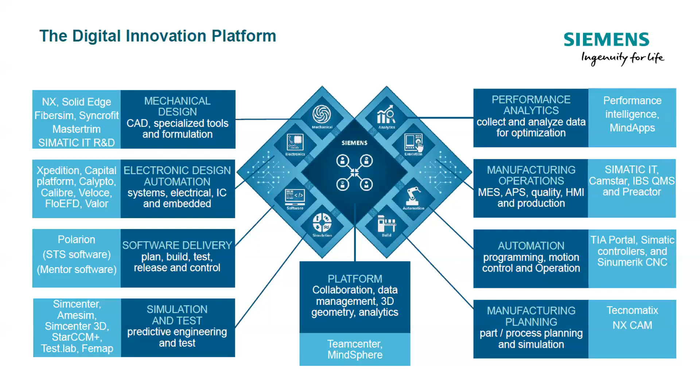Within NX, obviously, we have the CAD CAM. We also have simulation analysis tools within that, and the same as with Solid Edge. Under the software portfolio, there's solutions for a vast array of applications for electronic design automation, software delivery, simulation and test, performance analytics, manufacturing operations, automation, manufacturing planning, and all these can be made work together in collaboration using Teamcenter and MindSphere.

Let's focus in on the ideation phase, where performance engineering plays its biggest role in the product development process, and discuss a bit more how performance engineering also needs to evolve to support the concept of a holistic digital twin. First, it is clear from the trends that today's companies are dealing with increasingly complex systems and technologies, so it is critical that the tools they use deliver realistic representation of their product to give confidence in their designs and their design decisions.

Second, to support the digital twin, it is critical that performance engineering processes are not isolated and disconnected from the rest of your organization or the PLM process. We need to connect people, projects and data. If companies are able to reduce barriers, they not only increase their process efficiency, they also get a more holistic view to make the right decisions with all stakeholders across the organization, and are able to close the loop and complete the engineering cycle.

Finally, having a realistic integrated process and models today is not enough. You also have to be able to deploy them so that they bring necessary insight to make decisions and do it quickly. So companies must have the ability to intelligently explore the design space to quickly trade off and discover better designs. This, of course, also means that we need to be able to interrogate the information from these hundreds of designs to make the decisions. High quality analytics as well as visualizations are also critical to make the simulation usable and accessible.

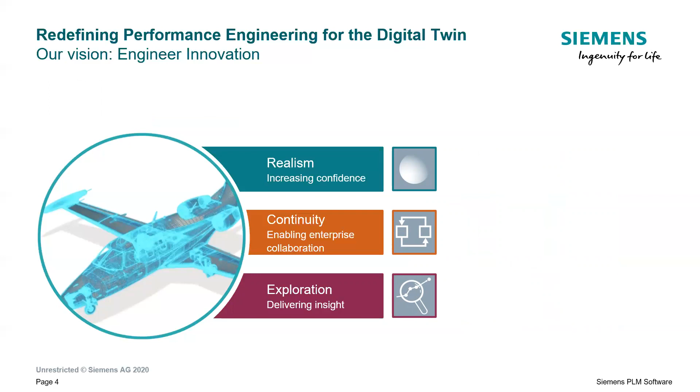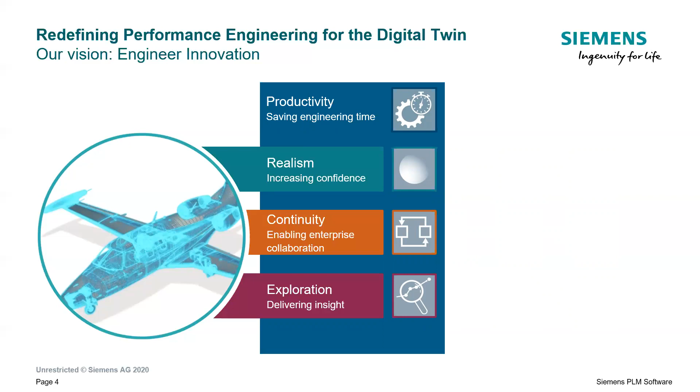And of course, the backbone of all of this needs to be a set of streamlined and automated workflows, consistent interfaces and efficient processes that reduce engineering time and allow engineers to spend their time where it matters, innovating. When companies transform their performance engineering processes in this way, they're able to engineer innovation. Ultimately, what this means is that they increase their market agility to bring better, more innovative products to the market faster and at a lower cost. This is what the Simcenter portfolio helps our customers achieve.

So how does Simcenter 3D realise this vision? First, let's look at how the portfolio delivers realistic models and increases model confidence. Simcenter brings a wide range of physics and disciplines together under one umbrella. Through its multi-fidelity solutions, including system simulation, CAE simulation, as well as efficient testing solutions, Simcenter covers all stages of development and leverages the tools together for a better product representation. Finally, we ensure that the solutions in Simcenter work together and embed the necessary technologies to capture specific industry challenges. By using all these capabilities together, engineers can be sure that predicted performance of their product will match real-world behavior.

Let's look at how the portfolio focuses on delivering insight. Simcenter includes an efficient and easy-to-use intelligent design exploration framework that easily integrates with your current design and simulation tools and fully leverages your HPC infrastructure. Simcenter also enables high-quality data and analytics to gain insight into data from many sources and make informed decisions. Simcenter includes dedicated post-processing and visualization capabilities to broaden the comprehension of the results.

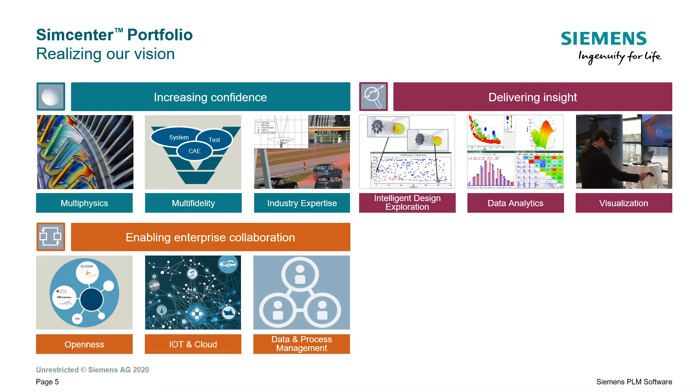Engineering teams today are generating huge amounts of data, and in order to be effective, this data needs to be managed and tracked. Simcenter is integrated with Teamcenter simulation process management to help engineers manage their models and data and keep them in sync with the design.

Let's look at how the portfolio focuses on your productivity, helping you save engineering time and accelerate your return on investment. The portfolio offers complete deployment flexibility to the user. This is achieved through flexible licensing to ensure companies can maximize the value of hardware and fully leverage investment in simulation technologies with HPC. The portfolio is supported by engineering services and support engineers.

Our team of technical experts has a broad engineering proficiency to help you achieve your complex design goals and deploy innovative engineering processes with Simcenter. Simcenter delivers streamlined and collaborative workflows. This ensures that the portfolio is easy to use and minimizes the learning curve and your time to be operational.

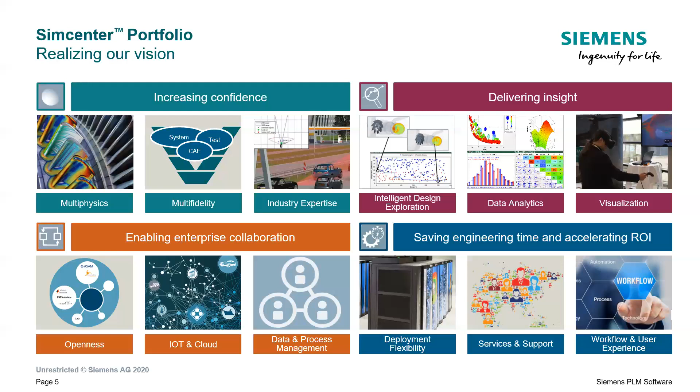Industries, processes and challenges. There's a need for high reliability, quality and performance. Products are more complex and expensive. There's a large variety of platforms and raised customer expectations. Lower product development costs are essential. Optimize not only unit cost but cost over life of the program.

Reduce testing and use testing more to validate simulation. Create products using simulation and without costly prototypes to speed up development. Develop new products faster. There are more appealing products than the competition. Make products more innovative and ensure their market appeal. Deliver breakthrough performance better than the competition, say like fuel economy, power, speed, or reduction in weight.

The machinery industry trends include the growing complexity required by customers, global competitive pressure from new low-cost providers, end customers' demand for customized products driving demand for customized machines, and regulatory pressures driving machine design. These trends are causing a fundamental change in machines and how they're being designed, built, and serviced. This has clear implications on trends, and the machines simply need to be smarter.

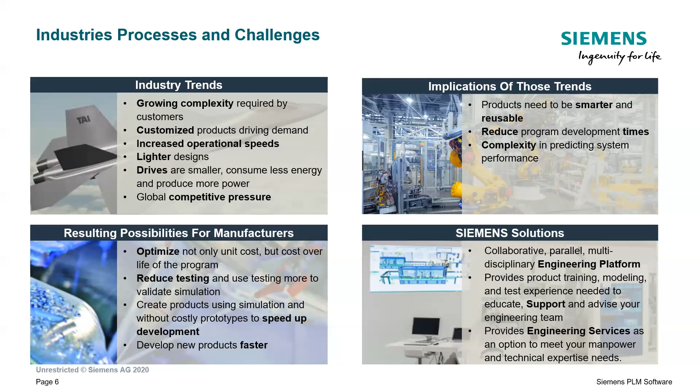There are 5 ways that Simcenter 3D is different than traditional simulation tools in use today. First, Simcenter 3D begins with the engineering desktop, which is the integrated environment in which you do all of your pre- and post-processing. Within this environment, Simcenter 3D offers best-in-class geometry editing tools, comprehensive meshing, and a unique ability to associate the analysis model to design data.

This helps engineers speed the tedious modelling process and keep analysis models in sync with the latest design. This then translates into faster design analysis iterations. Simcenter 3D then delivers accurate multidiscipline simulation from within the centralized engineering desktop. Simcenter 3D simulation solvers help you to predict real-world performance.

Simcenter 3D's unified environment is completely scalable and extensible. This means that the same familiar user interface is applied to all solutions and reduces training costs for the department. It also gives a common environment on which to build automated routines to drive simulation processes.

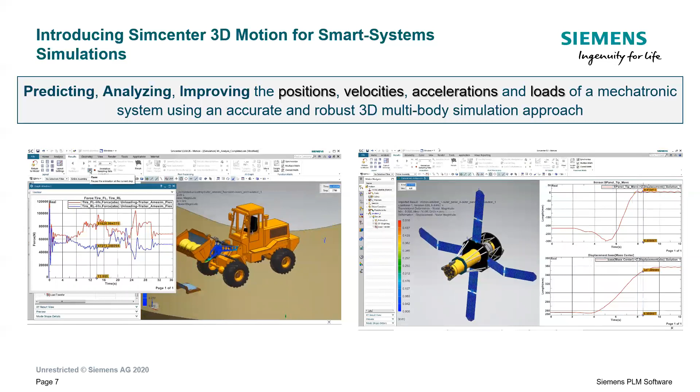Next, Simcenter 3D can link with your broader systems, engineering processes, and tools for 1D systems and physical testing. Simulation data management lets you track information throughout the development process and can help you correlate your 3D simulation models with your 1D system models and physical tests to deliver confidence that your simulations predict real-world performance.

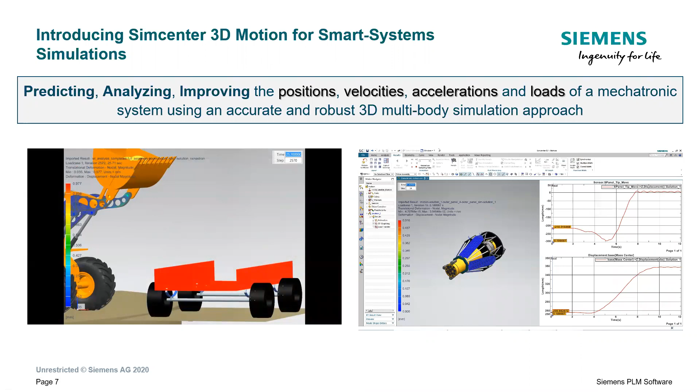And finally, Simcenter 3D's common interface means it's much easier for engineering departments to capture simulation knowledge and leverage that industry expertise by automating it and deploying it to a broader team. This can help simulation teams become more flexible and adjust resources to meet fluctuating demand. Simcenter 3D's integrated solutions also incorporate Siemens' own industry expertise that has been gained over decades.

How can Siemens help you meet the challenges? Siemens provides the world-class CAE simulation software analysis tools needed to predict complex behavior. It provides product training, modeling, and test experience needed to educate, support, and advise your engineering team. Provide engineering services as an option to meet your manpower and technical expertise needs.

Siemens Solutions: more insight by test and simulation, scalable solutions, widest possible integration, customizable, an open platform. The benefits: more insight to optimize total program costs, more insight to build in future growth compatibility, scalable solution to handle wheels, track, manned or unmanned vehicles, customizable for complex operating environments, an open platform for integrations.

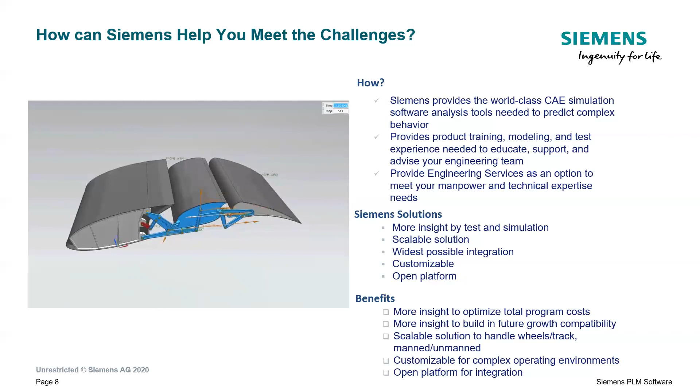Front-load designs, multi-body simulation from the beginning of the digital development process. We have close connection to design tools and scalability. For mechatronics, increase in complexity of electronic systems. The solution: easy integration of control systems in mechanical models. Real-time simulations, early integration of flight simulators in the design cycle. Solution demands real-time capable models with high level of accuracy.

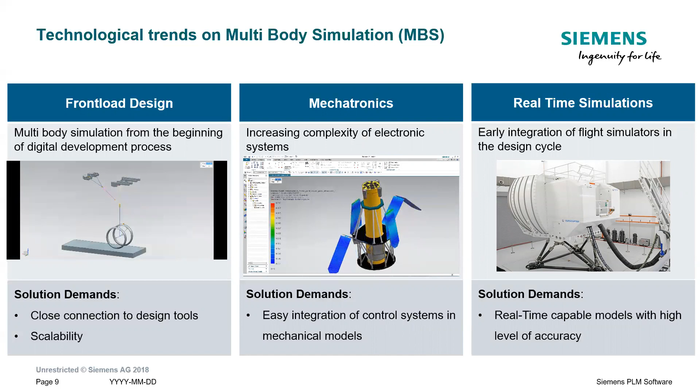Motion study is based on a skeleton wireframe concept. Results of the motion study are giving the CAD specifications: components, mass properties, mass, inertia, gravity center, joints, orientations and positions. The motion skeleton is generated following the whole product requirements. The skeleton model itself is a parameterized template in order to generate a family of models. There could be different templates per sub-product architecture type.

Reusability of the same skeleton generated model. Drive multiple revisions of the same product due to performance optimization and technical specifications. Also used for multiple configurations of the same product and mass properties. Can be used for multiple or different products.

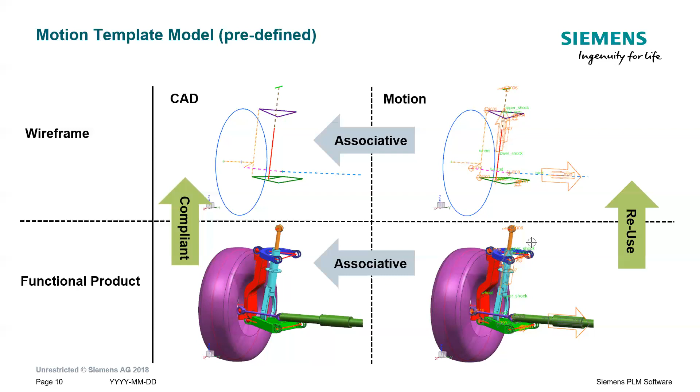Because Simcenter 3D is built using the same foundation as a CAD system, it has much more powerful geometry editing capabilities than traditional motion tools today. First, Simcenter 3D can take an NX CAD assembly model and then automatically convert the CAD models into a motion model. Each assembly component will represent a link within the motion model, and Simcenter 3D will convert the assembly constraints to proper motion joints. 3D contact can also be defined between each part of the model, and the contact definition will take the actual geometry into account.

The motion model is entirely associated to the base NX CAD model, so it is possible to update the motion model whenever the base geometry changes. This allows engineers to stay on top of design changes and speed the design analysis iterations. And powerful and intuitive geometry editing capabilities like direct geometry editing using synchronous technology let engineers try what-if type scenarios themselves without having to go back to the design team to make changes.

The NX CAD integration, it is CAD agnostic. Quickly convert CAD assembly to a functional motion model. Assembly constraints converted to motion joints, 3D contacts between bodies. Stay associative to design. Support for all major CAD formats. As we can see here, we have NX CAD, CATIA, Solid Edge, SolidWorks, JT, Parasolid, STEP, IGES, ACIS and AutoCAD.

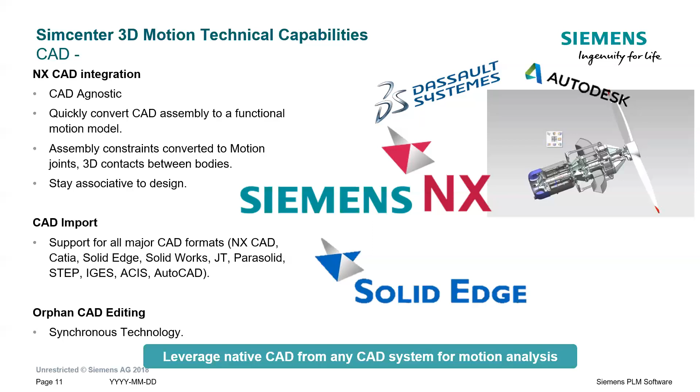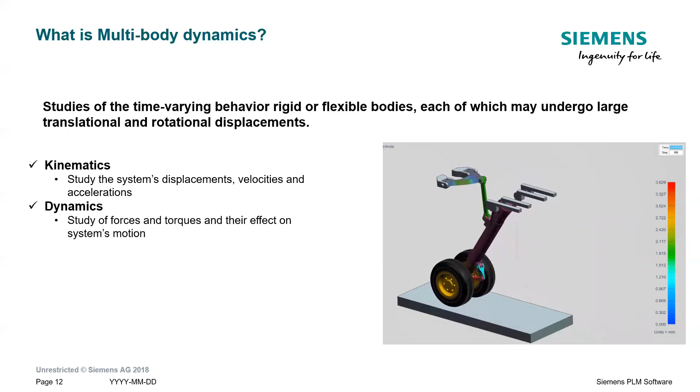Motion analysis, otherwise known as multi-body dynamics, is the study of the behavior of interconnected rigid or flexible bodies, each of which may undergo large translational or rotational displacements. Motion analysis can be broken down into two major types of analysis. Kinematics: study of the motion of objects without reference to the cause of motion. Does not take mass, inertia, forces, torques, and others into account. Dynamics: study of forces and torques and their effect on motion.

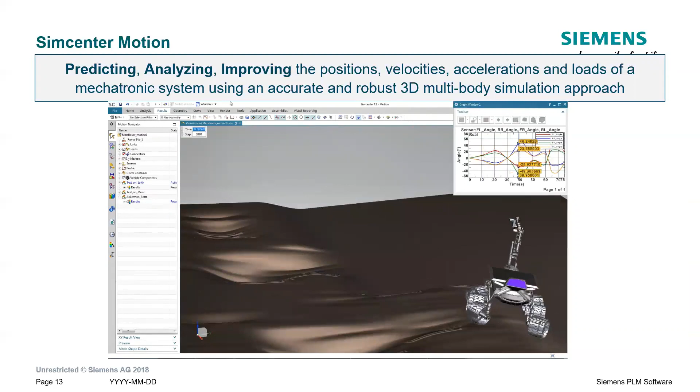Simcenter Motion is to be used to improve mechatronic systems by giving a user a set of tools to predict and analyze the positions, velocities, accelerations, as well as the loads of the system. This is accomplished through a robust 3D environment linked to a proven, accurate multi-body solver.

A good way to summarize the main characteristics and benefits of Simcenter Motion is probably a complete and integrated multi-body solution to simulate realistic motion and loads of mechanical systems, allowing to quickly analyze and optimize the real-world behavior of mechanical design and to verify that it performs as expected before committing to expensive physical prototype testing.

By detecting any problems early in the design process, Simcenter Motion allows also to front-load the possible solutions as well as to explore limits without putting people or expensive equipment at risk.

It provides leading-edge technology in solid modeling, parameterization, CAD geometry, flexible body features, control and hydraulic capabilities, solver performance, animation and post-processing capabilities, all integrated into a single user-friendly desktop environment, eliminating the need for multiple solutions and time-consuming data transfers. The elasticity of subcomponents of a mechanism can be incorporated by means of linear mode sets.

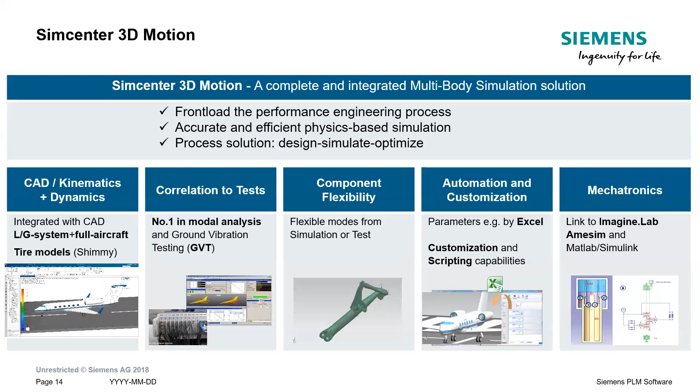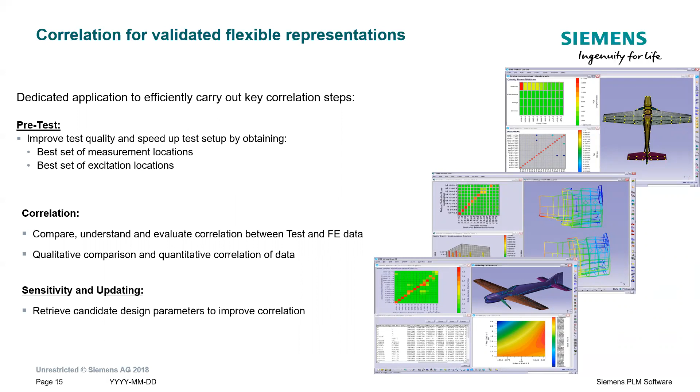Correlation for validated flexible representation. Dedicated application to efficiently carry out key correlation steps. Pre-test: improve test quality and speed up test setup by obtaining best set of measurement locations and best set of excitation locations. The correlation: compare, understand and evaluate correlation between test and FE data. Qualitative comparison and quantitative correlation of data. Sensitivity and updating: retrieve candidate design parameters to improve correlation.

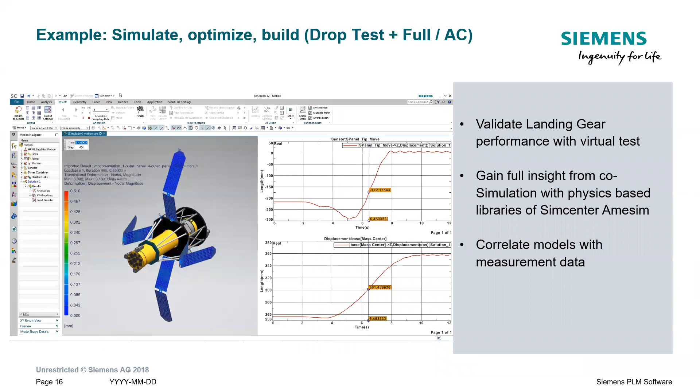Simulate, optimize, build. Validate landing gear performance with virtual test. Gain full insight from co-simulation with physics-based libraries in Simcenter Amesim. Correlate models with measurement data.

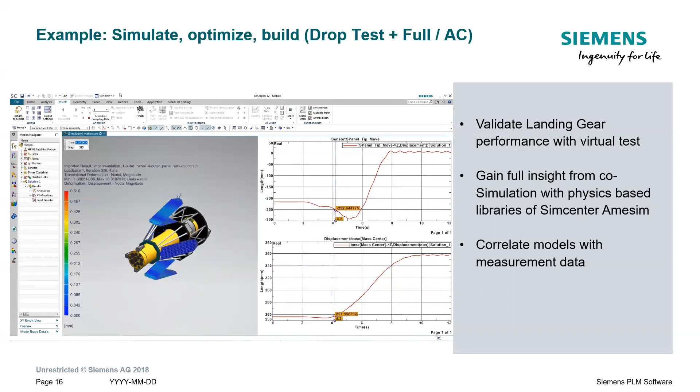Here we have the landing gear with loose dampening. By decreasing the dampening, one can decrease to some extent the loads on the landing gear, beams and struts and connection points in the fuselage, but the landing gear might experience bouncing off the ground, and this will induce less plane control and less passenger comfort.

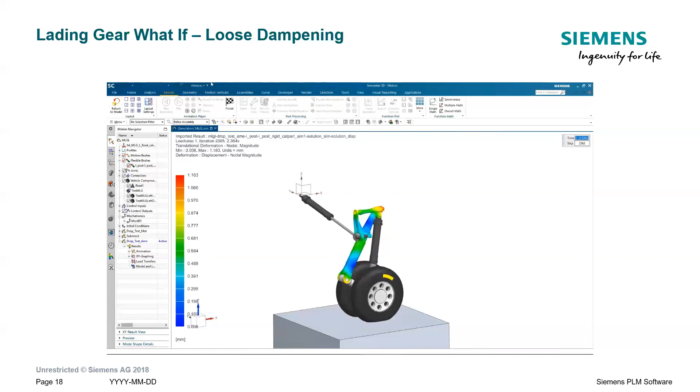And here is the result of what stiffening up this dampening effect does to the system. By increasing the dampening, one increases the loads on the landing gears, beams and struts and connection points in the fuselage, and it will deform harder as a result, but instead the landing gear will experience less bouncing off the ground. This induces more control and provides stability to the overall landing effect.

Now I'll describe some of the disciplines and applications which are offered by Simcenter 3D. Let us start with the structural analysis. Simcenter 3D capabilities include metallic but also composite materials. It can be applied to fuselage, wings, but also what we call large FEM assemblies, very useful to facilitate cooperation between OEMs who will manage the FEM assembly and the global model, and the risk-sharing partners who will provide the different FEM models of their own components.

When designing composite components, we may also mention the capability to simulate manufacturing processes and phenomena like curing and springback. Damage-tolerant design is an important concept for airframers as it allows to take full advantage of the material's capabilities to support loads. We provide everything you need to support this design methodology for composite components where delamination and damages are allowed to grow, but in a controlled way.

Motion is another discipline offered by Simcenter 3D. Wing flaps combine CFD and structural analysis to assess the structural performance, but simulation must also study the motion mechanism of the flap to make sure it responds correctly.

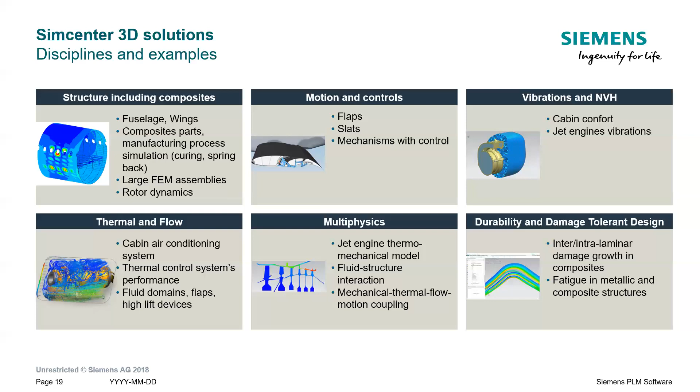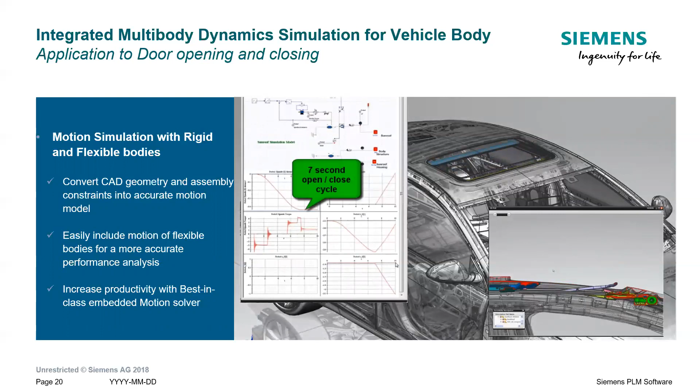This example shows an electrically controlled sunroof of a vehicle. The control strategy was developed in MATLAB and is used to control the motion simulation. This verifies that the control strategy is effectively controlling the physical mechanism and operating as required. We can see the various components activating and behaving as controlled by the strategy, validating that it's correct and driving the mechanism properly.

This is a fine example of co-simulation where we initially built the 1D control strategy, and from working through and building up the CAD models, we can verify that the control strategy is correct and driving the mechanical components correctly. It also tests that the mechanical components behave as required when controlled by the electric strategy.

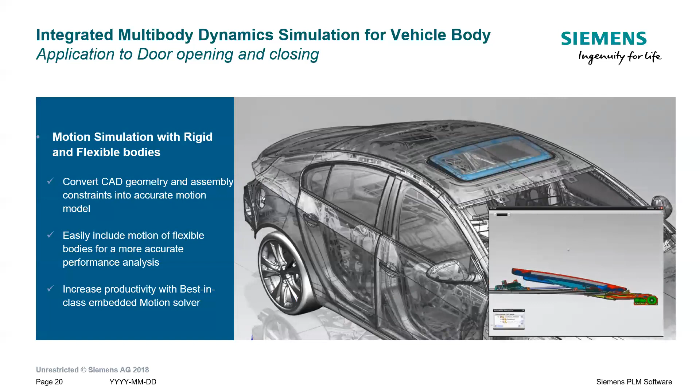Here is another great example of how Simcenter 3D can safely test the control strategy as well as the mechanical controls. We have the sunroof operating, sensing when there's an arm in the way, and testing that safety feature. This can all be done prior to any prototype, ensuring the safety control within the strategy is correct and the mechanisms will behave as expected with no surprises when we build the prototypes.

This saves an awful lot of time and money because we can run these checks without risking anyone or any expensive prototypes, and we can easily see how effective the 1D strategy is at safety.

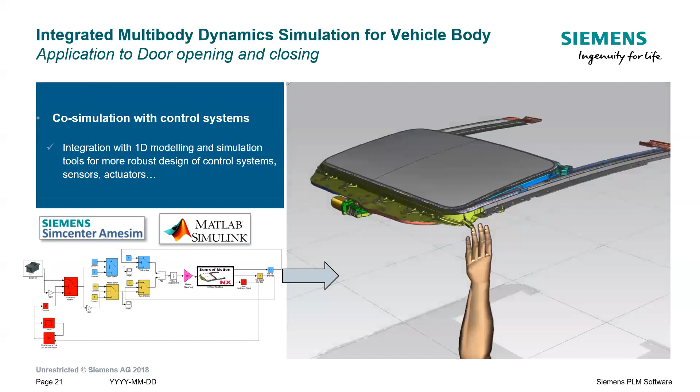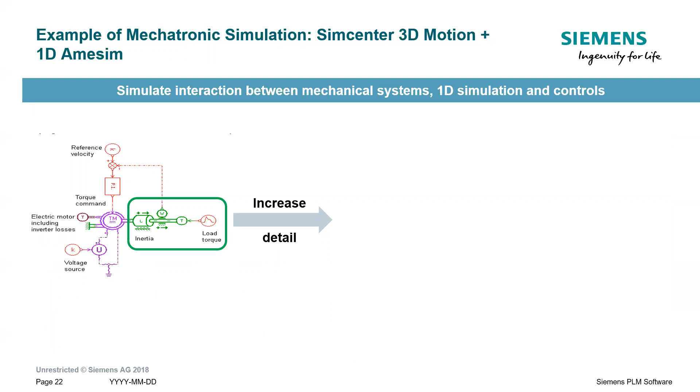Another example of how NXCAE supports systems level modeling is in the area of co-simulation of mechanical systems with controls. Control engineers need good models of the mechanical system to test out their control algorithms. Conversely, mechanical engineers need the ability to simulate the motion of their mechanisms with controllers.

NXCAE enables both these scenarios and is today the only system that integrates design, co-simulation, and flexible bodies into a single environment. Discover and resolve problems earlier in the design cycle, and investigate situations not possible before.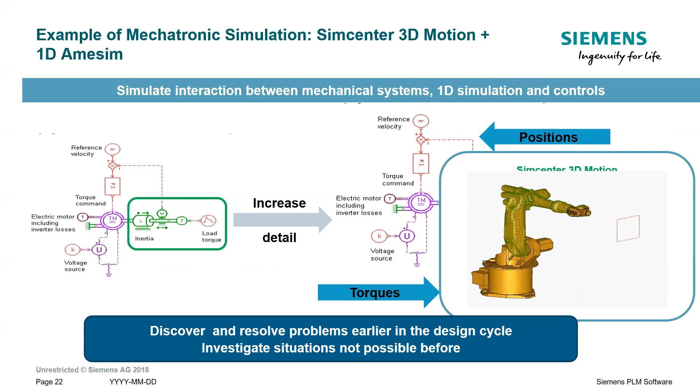Simcenter 3D Design Space Exploration. Here we set the geometry, the material choice, and the properties.

Simcenter 3D Design Space Exploration automates the CAE process using the Sherpa library of algorithms for fast design space exploration strategies. In this example, we aim to minimize mass while satisfying CAE constraints like stress and strength. The only variable is the CAD geometric parameters. Here we see each iteration being simulated and analysed simultaneously, with changes made to get as close to the outlined parameters as possible while satisfying all other design requirements.

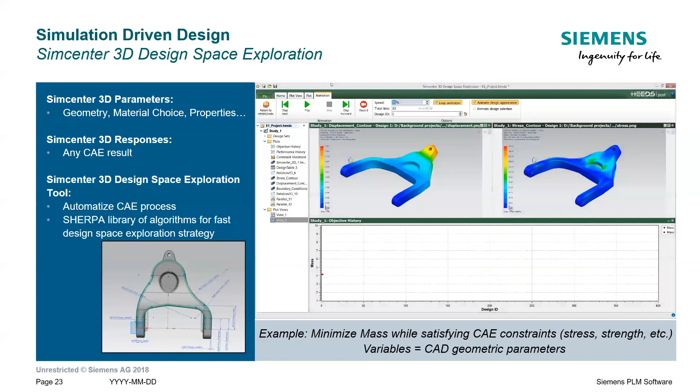Revolutionary real-time capability for Simcenter 3D motion models. Unlock new external model integration possibilities: add a model to an RT platform, integrate with other multi-physics models, and combine with RT simulators or hardware in-loop.

Reuse existing models or extend the accuracy of RT models by adding more degrees of freedom than ever possible with previously reduced models needed for RT performance. Validate both the mechanical systems and the control systems on the basis of the same 3D high fidelity models across teams.

Clear process time savings, increased frequency and load range, decreased uncertainty from multiple models of the same system. Deliver real-time simulations with multi-body simulation models using graphically created 3D CAD-based models or 3D analytical models and mode-set flexible bodies. Real-time model performance from the Siemens NX platform with Simcenter 3D Motion for external real-time platforms.

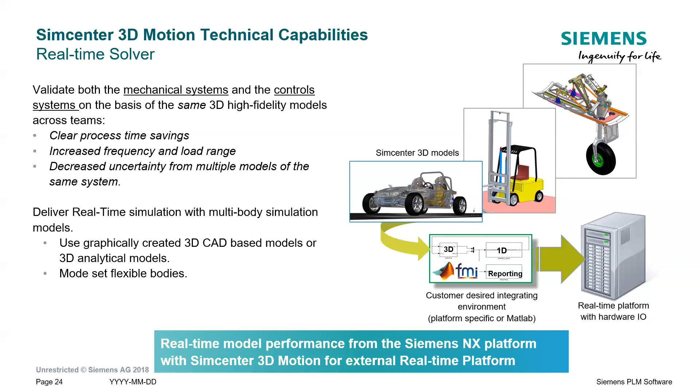Integrated design and analysis pays off on the design of NASA's next generation launch vehicle. The use of Simcenter 3D Motion and Simcenter 3D in an integrated design analysis process managed with Teamcenter helped engineers ensure that a larger nozzle won't hit launch pad structures during liftoff.

Here we can see faster creation of analysis models. Analysis plays a greater role in the design process, with higher confidence and accuracy of analysis models.

Integrating CAD and CAE without data translation is a win-win for everyone. Not only are we saving time from translating between file types, we're also eliminating the risk of working on out-of-date data. The main intent was to use Simcenter 3D Motion to capture the timing and sequence of the rocket taking off and the retractable launch mounts moving back.

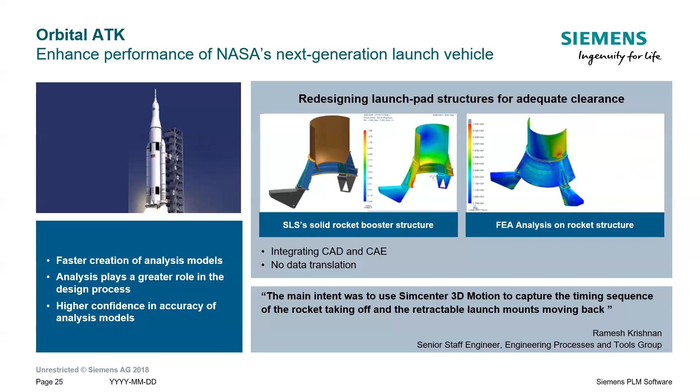Here is an example of the development of one of the Mars rovers from JPL. JPL faced development challenges with the latest Mars rover in the form of a tighter development schedule. It's also the most complex rover to date, with more moving parts than before.

In order to meet the schedule, JPL needed a simulation tool that would let them adapt rapidly to design changes and provide faster design analysis iterations through close collaboration between engineers and designers. They chose Simcenter 3D for these reasons, and its motion analysis capabilities were used to study the various moving parts of the rover. The business challenges were tighter schedules and more moving parts.

The keys to success: a single software platform, NX, from design through manufacturing; a digital assembly model of the entire Mars Science Laboratory; and multidiscipline simulation with Simcenter 3D software. The results: faster design analysis and redesign iterations, less manual work and rework, increased efficiency, and more confidence in the hardware modeling, design implementation, and mission simulations.

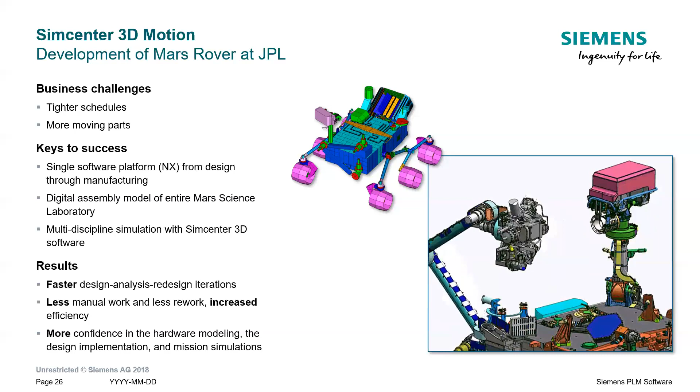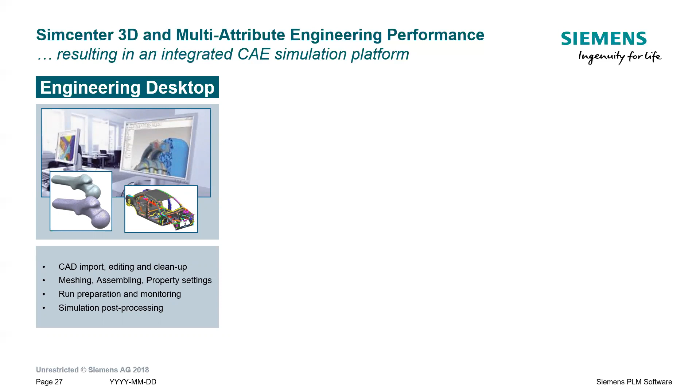Simcenter 3D multi-attribute engineering performance results in an integrated CAE simulation platform: engineering desktop, CAD import, editing and cleanup, meshing, assembling, property settings, run preparation and monitoring, and simulation post-processing.

Solvers: here we have the many solvers, Simcenter Nastran, Simcenter SAMCEF, Simcenter 3D solver environments, MSC Nastran, Abaqus, and LS-DYNA. We have linear and non-linear, FEM, BEM, motion, thermal, and CFD, multiphysics, test CAE correlation, co-simulation, Simcenter Amesim, and Simcenter STAR-CCM+.

Vertical applications such as structural analysis, acoustics, NVH, multibody, driving dynamics, durability, thermal flow, and electromagnetics.

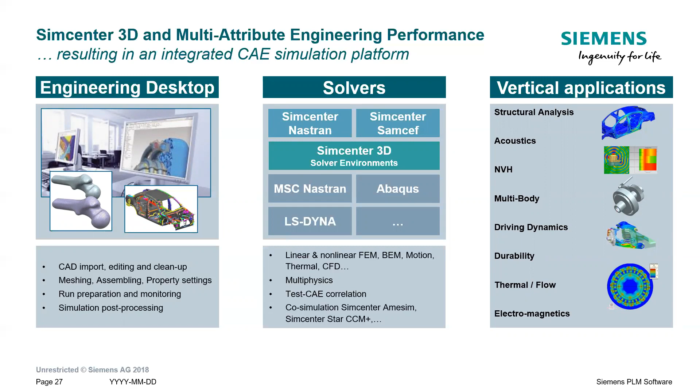Teamcenter for simulation, so we can combine all of these and have them work together, with all the data stored under one roof and being monitored under one roof with Teamcenter.

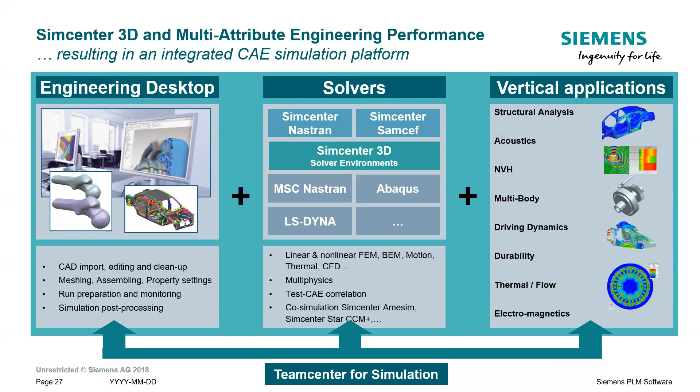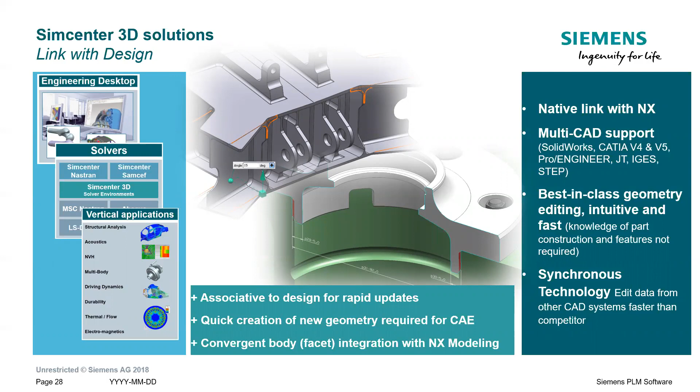Link with design: engineering desktop, the solvers, and the vertical applications are associative to design for rapid updates and quick creation of new geometry required for CAE analysis. Convergent body integration with NX modeling, native link with NX, multi-CAD support, best-in-class geometry editing, intuitive and fast. Knowledge of part construction and features is not required. Synchronous technology lets you edit data from other CAD systems faster than the competitors.

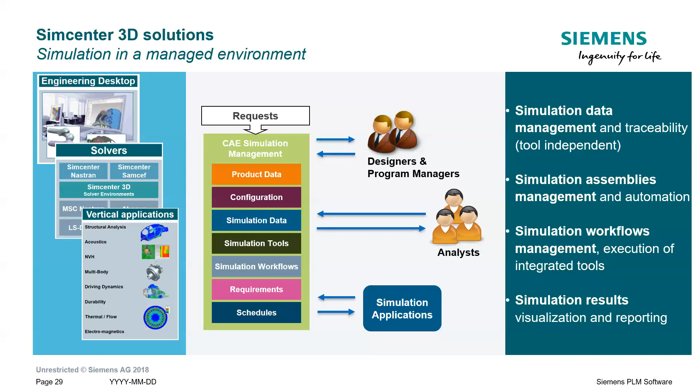The simulation data management and traceability is tool independent. Simulation assemblies management and automation. Simulation workflows management, execution of integrated tools where we work together, and there are outline workflows. Simulation results: we can easily grab the results with visualization and easy reporting, so we can ensure that the data is being presented in a concise way to save time and for clarity.